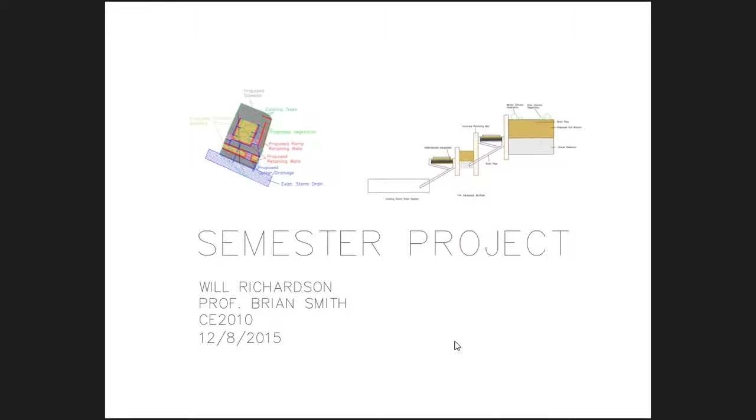Okay, so the main functions that my new design tackles are instituting a new handicap ramp, alleviating the volume of runoff that is causing all this flooding, and filtering the runoff of sediment and pollutants before it enters our overall water system in a sustainable yet aesthetically pleasing manner.

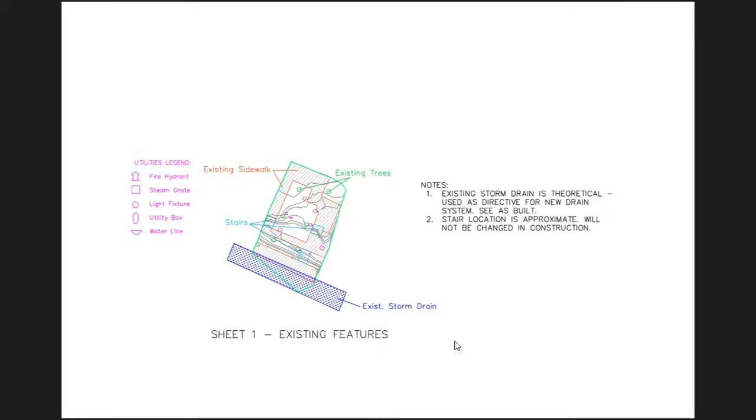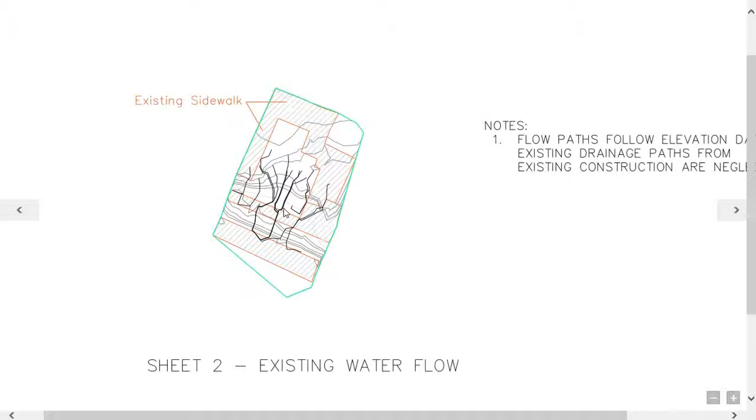So right here are existing features. We can see the trees are pictured, existing sidewalk follows this hashing right here, and the utilities, stairs, and existing storm drain are pictured. Now, if we analyze it using flow paths, we can see how water actually follows these elevations, and you can pretty much picture the source of all this flooding as it comes down and pools along these sidewalks, making it very difficult to traverse as a pedestrian.

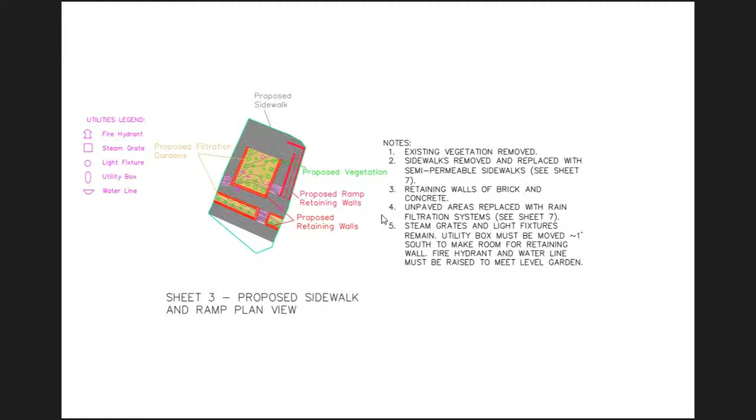So my design helps mitigate all of this flooding through the use of 2 rain gardens with new elevations and built-in retaining walls, a brand new gutter and drainage system, and semi-permeable sidewalks. So here's a very basic plan view of my design, and pictured are the 2 rain gardens right here. There's this rain garden, which is upper and level with the higher sidewalk up here. And then this lower rain garden, which continues along Engineering Way, is actually level with the lowest sidewalk, which is the vehicle access at the bottom.

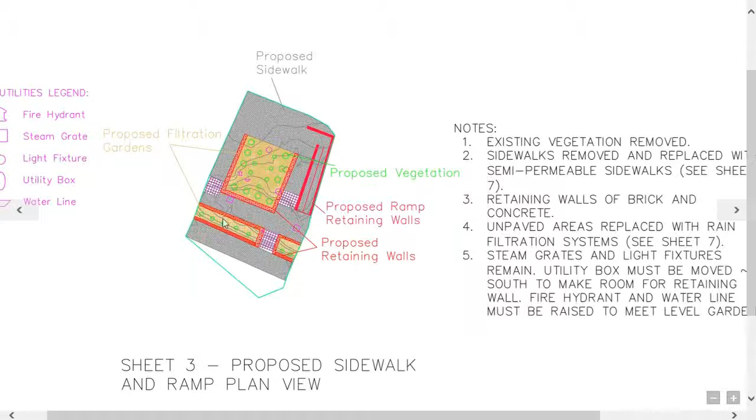As you can see, here's the ramp. The ramp design right here goes from the sidewalk up to the MECI building. And in general, the sidewalk and stairs sort of maintain their general shape because there have been no issues. It's very good for the flow of pedestrian traffic as is without the flooding.

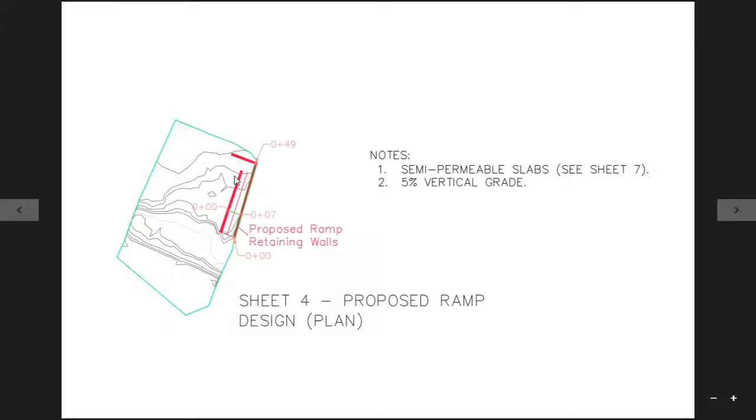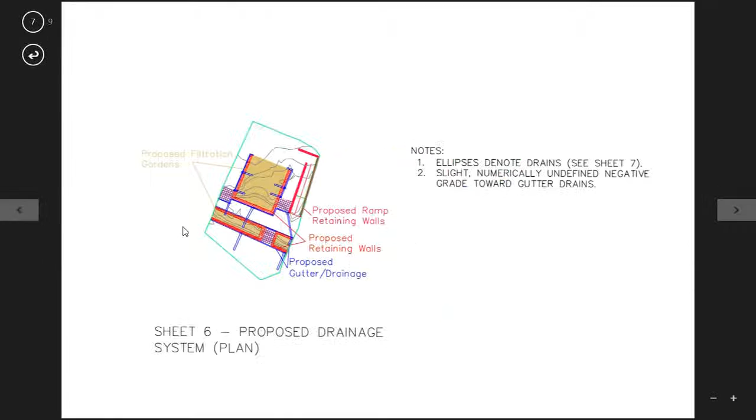Okay, so now we're going to talk about the gutter and drainage system, which is pictured in blue right here. And there will be more details to come in the profile view, but this gives a plan view schematic of it. And so you can see we introduced actual gutters on all the sidewalks, which is very useful and very needed, given the lack thereof right now, which causes all this flooding.

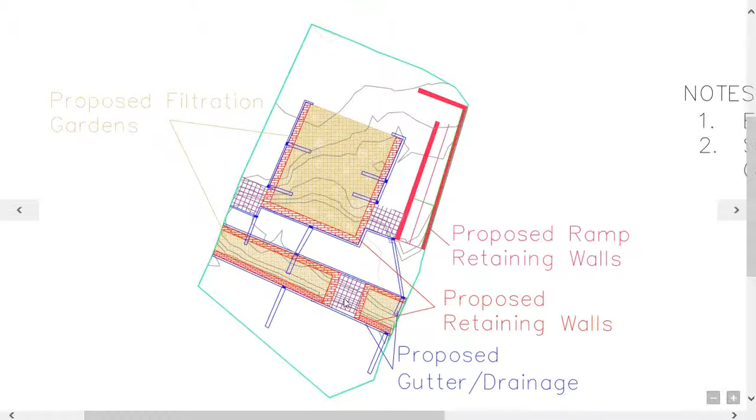So the actual gutters, combined with a sloped sidewalk, which slopes towards the gutters from the center, will allow the water to enter these drains, which are pictured with these little blue ellipses, and they will go from the drains either into the rain gardens, where they will be filtered through the different layers and back into the lower soil, or from the bottom here, they will actually go into the pre-existing storm drain system. So we can pull up that section view right now.

And so here's the section view. We can start with the gutters. You can see right here, these are the drain pipes. The gutters are on either side of the sidewalk. And the gutters will either deposit into the rain filtration system right here, which I'll go into later, or into the existing storm drain system, which I've simply represented with a rectangle.

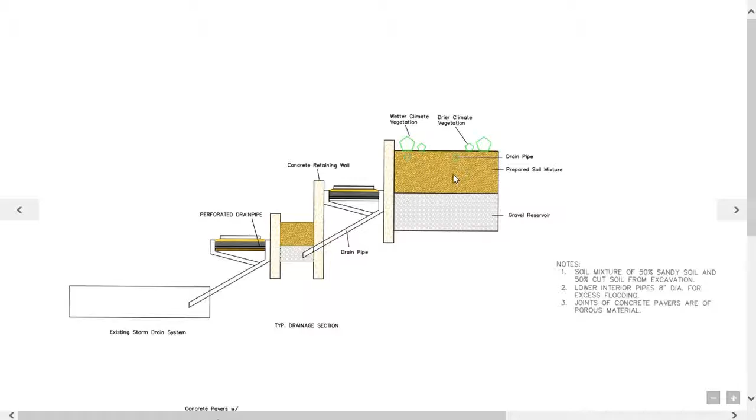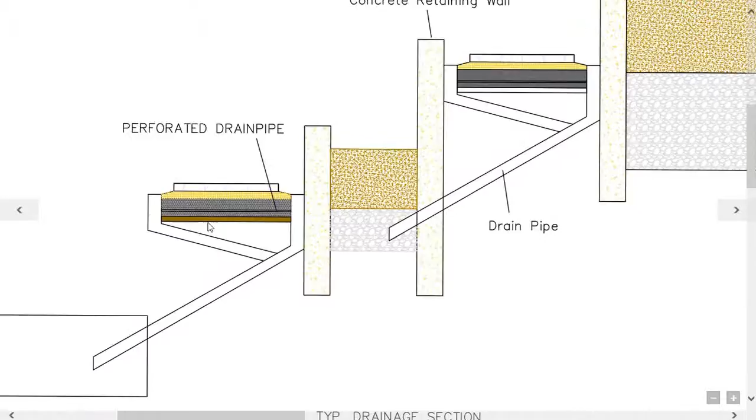Now the rain gardens right here, I'll zoom in on this, if it'll load. They absorb the runoff and rainfall and actually help purify the water before it enters the water table by going through these various layers. So right here we have a prepared soil mixture of primarily sandy soil and soil which will be taken from the cut of this lower rain garden, and then a gravel reservoir. So the water will actually travel through here and through the root systems of these plants, and a lot of the pollutants and sediment will be caught within the garden and eliminated before entering the water table.

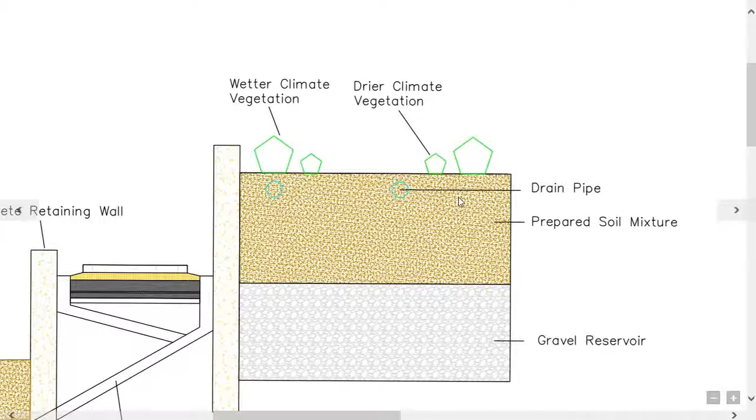Now another important note has to do with the vegetation on top. So we are getting rid of all the pre-existing trees in the current design and replacing them with smaller but more practical plants. So right here I very crudely represented the plants. However, the inner plants, as they'll be handling more of the rainfall as it enters the center, will be more suitable to wetter climates, whereas the plants on the outside are more suitable to drier climates and will not have to deal with the excessive rain flow as the central plants.

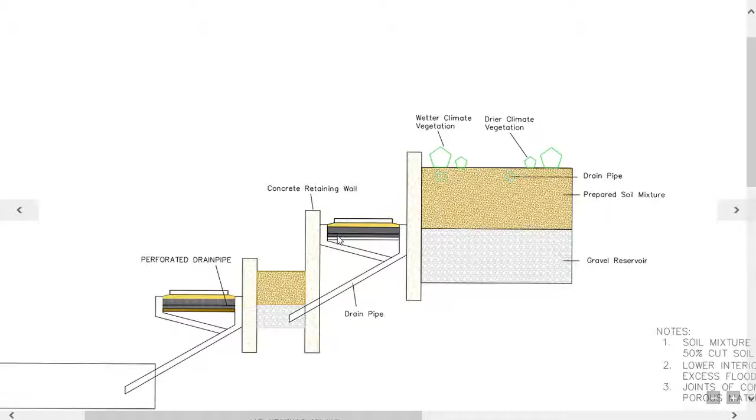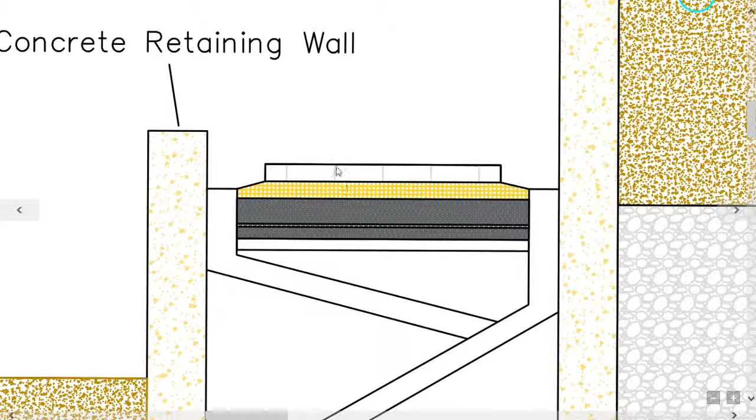Okay, now finally, I'll talk about the sidewalk design. As I mentioned, they are semi-permeable, and this allows some of the excess rain flow to enter through the sidewalk down here and either go through the gutter system or just down into the soil below. And so right here, the top surface, it's very crudely represented again, but actually between concrete pavers there will be semi-permeable materials which will allow rain to seep through.

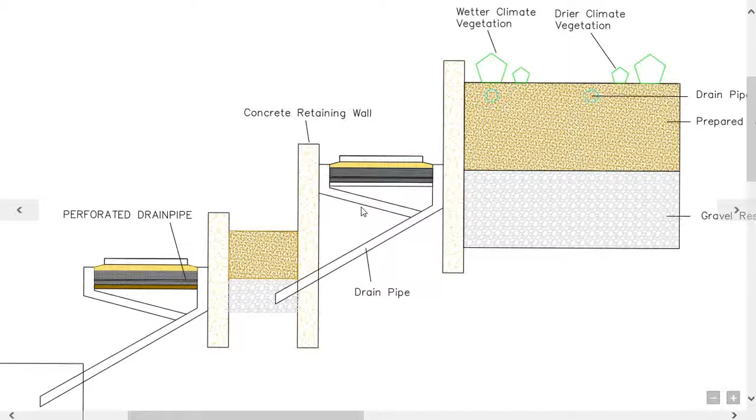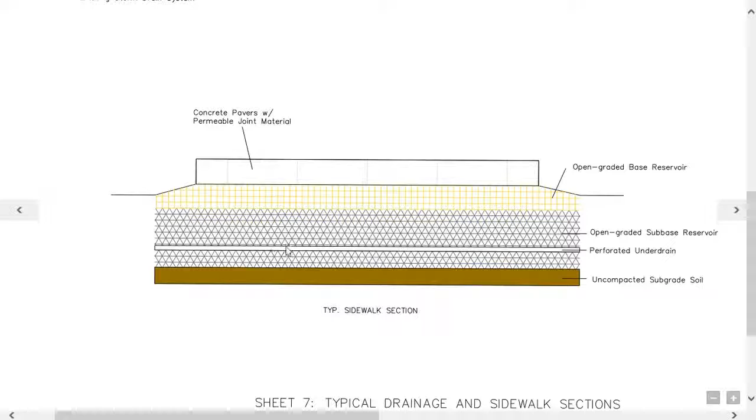Once it seeps through, just like the rain gardens, it'll direct runoff underground rather than to the drains or to the surrounding pedestrian areas. So actually we can get it right here. So we have the base reservoir, just different materials, allowing the water to go through smoothly and receive some kind of filtration. And then right here, if you look closely, there's actually an under drain. It's perforated, allowing some water to collect in it, and this under drain will direct water into the gutter system, and the rest can seep through into the ground.

And so that is my design, and I firmly believe that it will help mitigate the extreme flooding that has caused a lot of trouble in the last few years.